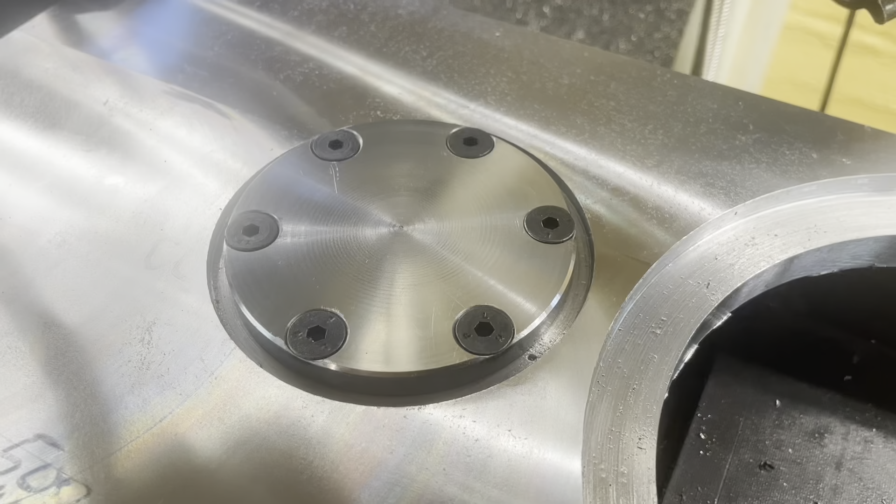Well, that came out pretty nice. Hope I put enough screws in there.

Well, here I am, back in the shop again. One of the requests I've had from several subscribers is to share a little bit more of the thought process behind the design of the housing, the design of the assembly, when I make one of these machines. And so what I'm going to try to do is share a little bit of that right now.

So I've spent quite a bit of time thinking about this. I've thought a lot about how long it's been since I've used a CAD program. It would definitely be easier to show some of this stuff on a 3D solid modeling program, but I've been through so many of those in my engineering career at various levels of proficiency. But the problem right now, especially since I've been retired, is I don't use them enough to maintain the proficiency, and it's kind of like starting over every time I do it. So anyway, this is where I am right now.

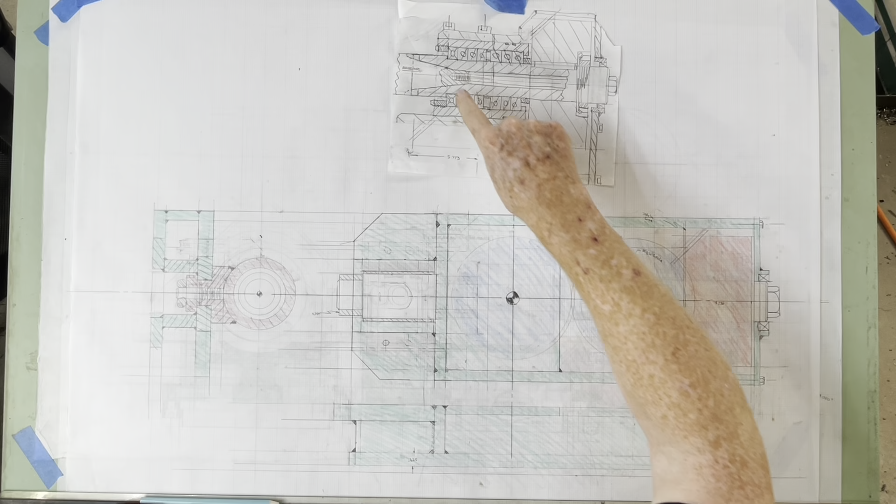I rethought the bearing support for the spindle. So this is the spindle that will drive the hob and locate the hob. It's going to be a 30 taper. It'll have a drawbar through the middle, and it's going to be supported in the center of the spindle by a stack of angular contact bearings. I think that's going to be just fine for what this has to do.

So the drive gear is going to be overhung rather than have bearings on both sides. I think that's overkill. So I'm going to put a stack of 6 or 8 angular contact bearings right down the middle, mounted in a common bore. It ought to be really easy to get this machined correctly for that. It doesn't really take much to locate those.

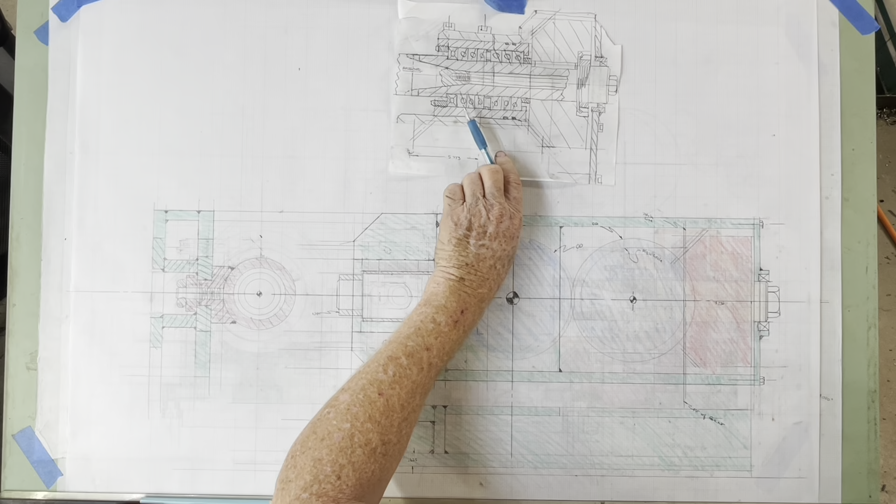You just stack them up with some of the bearings oriented with the pressure angle that way, some of them oriented with the pressure angle that way. And when you clamp it all up, they come together just right.

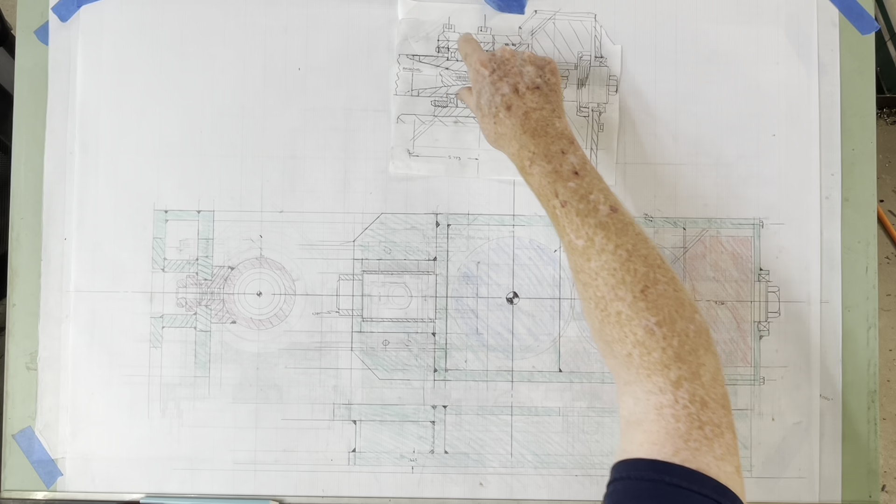So those bearings are going to be mounted in a bearing retainer, a bearing locator, a sleeve basically, some O-rings, threaded nut on one end to clamp everything up, and then that'll go into a bore that is mounted to a heavy cover plate that covers part of the back part of the box. And so that'll be adjustable this way. There'll be some kind of clamp arrangement to clamp down on that and locate it and retain it.

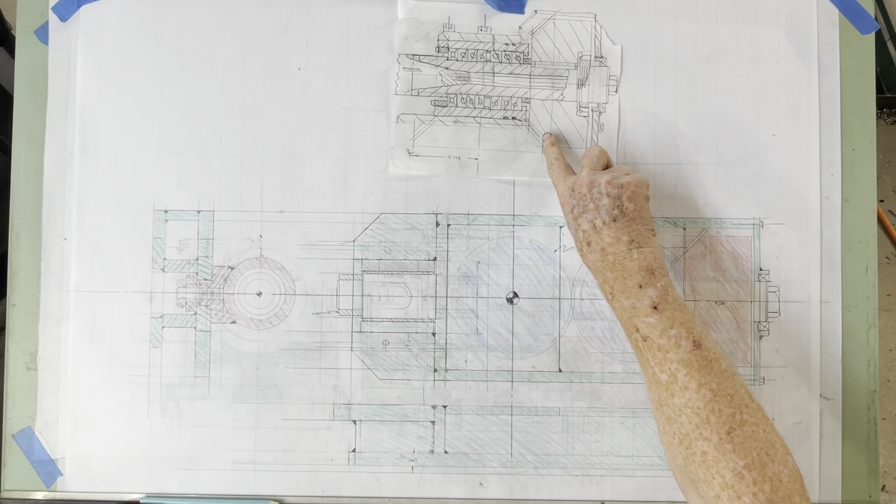That'll give me the ability to have a little bit of adjustment on the engagement of these bevel gears, so that's good. There'll be a cover plate that comes in from the back, just mounts around with a group of cap screws for sealing. I'm sure it's going to require RTV to get it to seal.

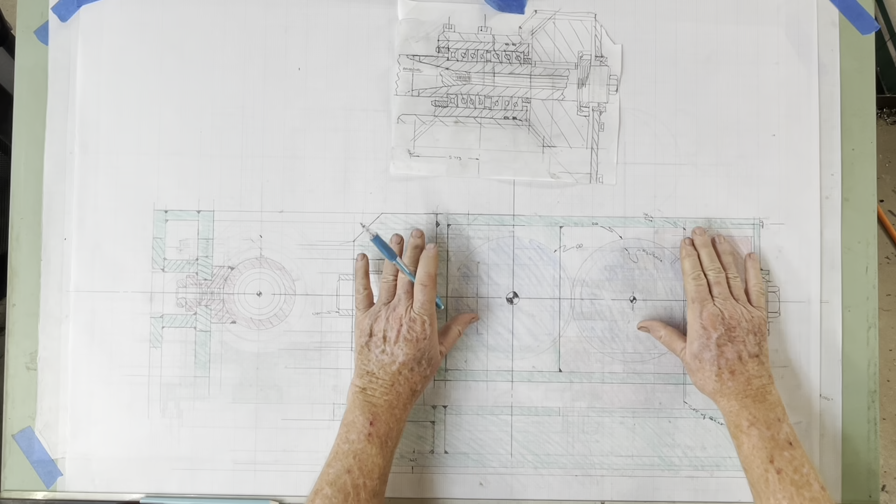But the housing itself, so this is the top view of the housing. The spindle of the machine tool head is going this way. The axis of the hob is running this way. So this is the kind of plan view. This is the edge view down here, and this is the end view.

The backbone is this 5/8 thick piece of steel here that's about 19 inches long and 8 inches wide. And that really forms the primary structural surface or structural member. But there are also these side rails that are that wide that run around 3 sides of that. In the back, there's a set of ways that'll be welded on standoffs like that. So this is kind of a section view.

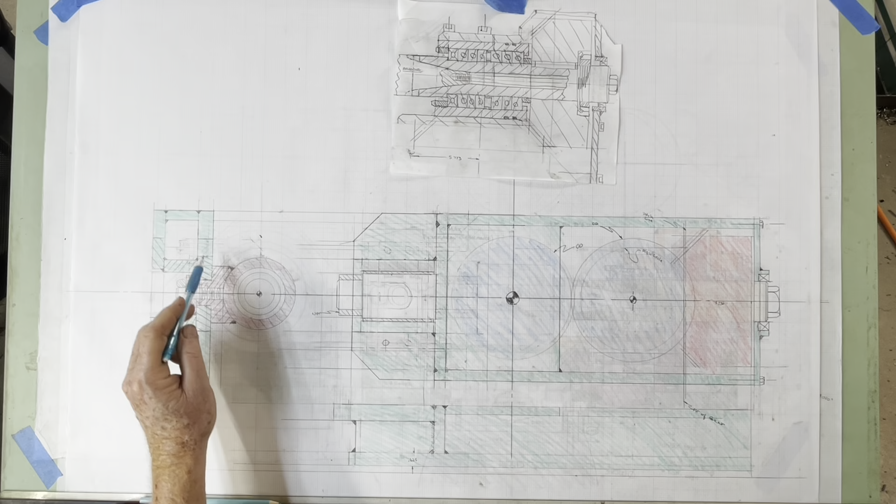The ways will provide location, but this whole top surface, the ways here and the tops of these side rails all have to be machined to a flush condition. This part here needs to be oil tight. I'm going to run this about half full of oil to splash around and lubricate all the components, the bearings and so forth.

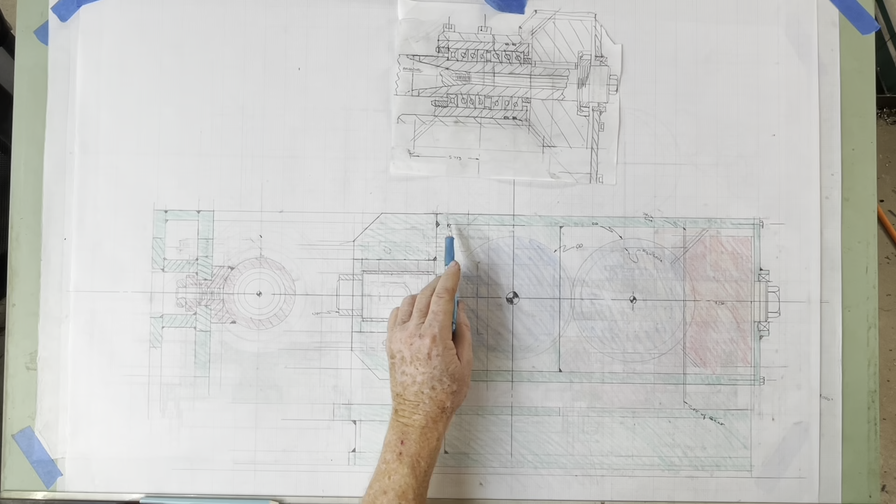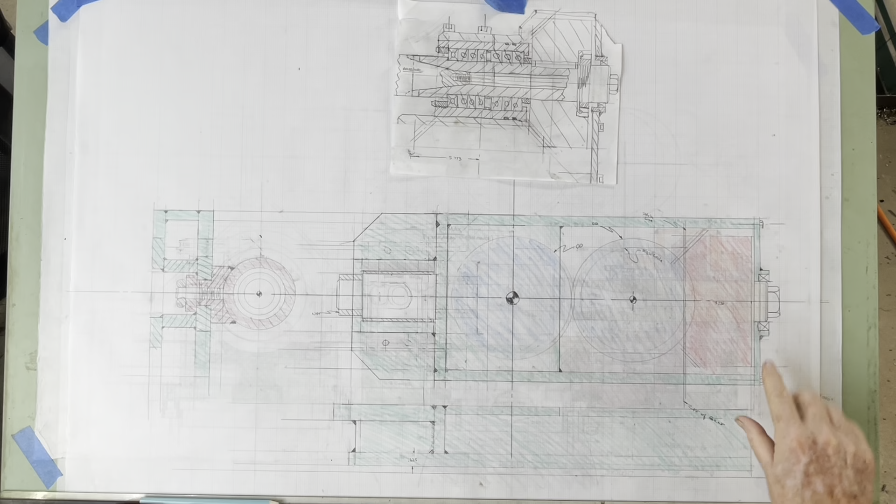So that's important that it be oil tight. There's going to be a flush cover that'll have to be welded in between these rails. I'm going to have to do a scarf weld around the three sides of that because it needs to be machined flush. And I mentioned the bearing support is attached to the cover that'll go over this, probably with a couple of dowel pins and a bolt pattern that will mount it and retain it and locate it.

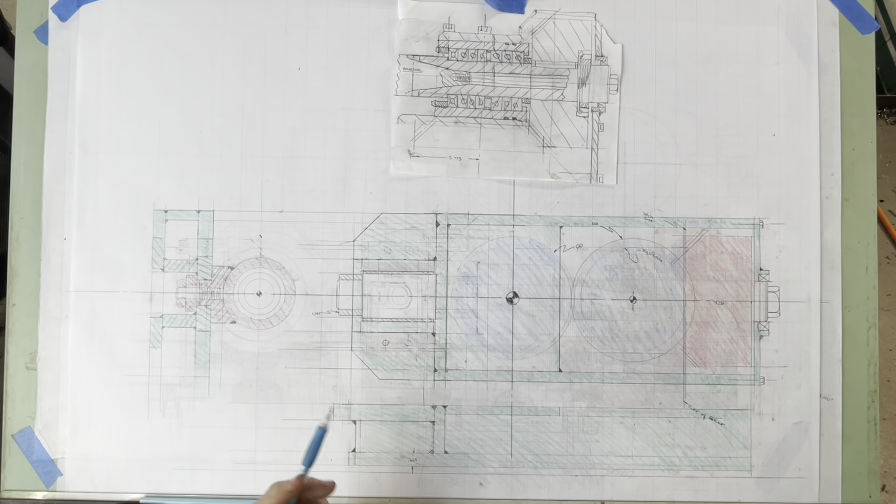This end is going to be a bronze bushing that'll go on a standard bearing block from a 1¼ inch arbor set. That's going to be the outboard support, and that'll be adjustable in and out for different sorts of operations. But basically, that's going to be an oil lubricated bronze bushing. There's quite a bit of area there. Those things really do a pretty good job. I'll have to come up with a way of supplying oil to the bushing, which I haven't done yet. But basically, that's the setup.

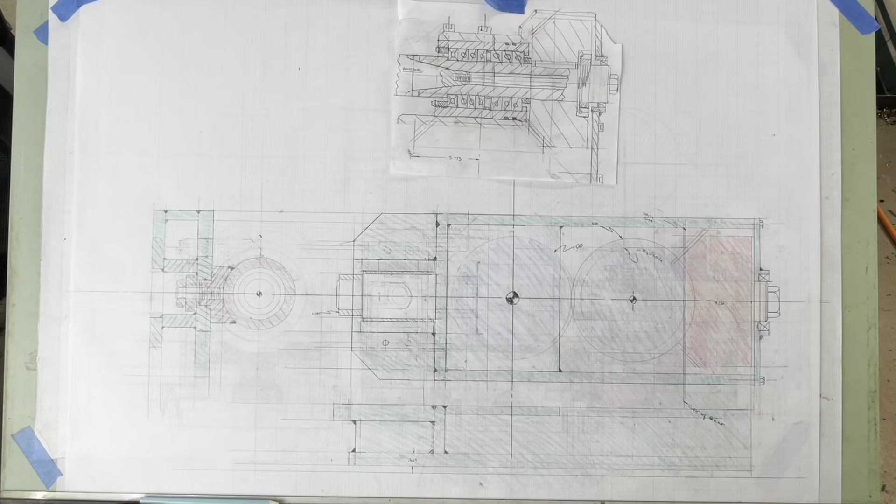So I need to start cutting pieces of steel to go on here. I'm going to start by cutting this big piece and getting it set up. I'm going to have to do some pre-machining on the inside because I don't want to machine any of that surface after everything's been welded. So, and then cut the side pieces, cut these rails and so on, and I'll have to kind of lay them out and see what the best sequence of welding operations is. So I'm going to try to cut all the rough stock, lay it out on the bench, and we'll make a plan from there. Well, this may take a while.

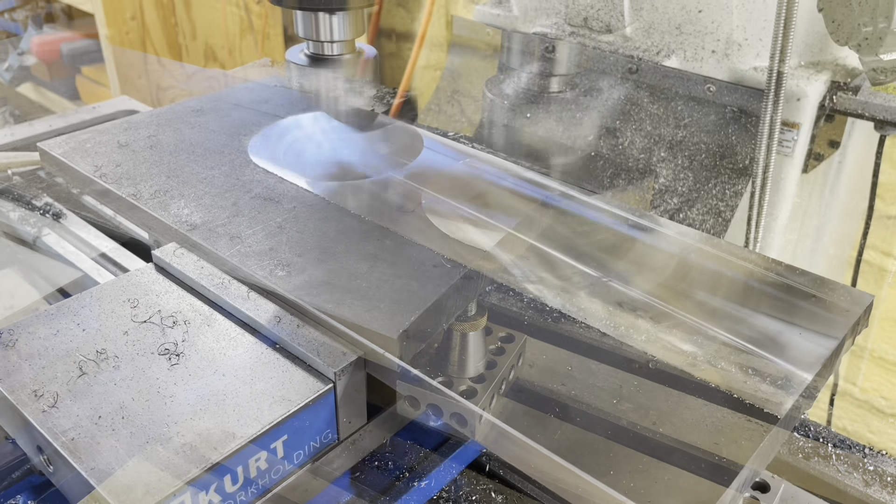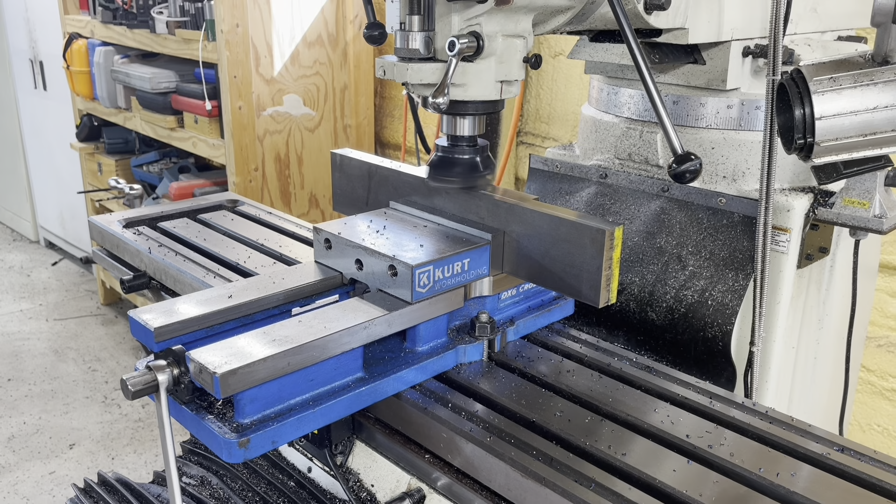Well, flattening a piece of steel plate this way with light cuts and a fly cutter is tedious as all get out, but boy, the finish sure does look good. I'm helpless before a good surface finish. Slow, really slow, my God. Man, I gotta get a vertical bandsaw. I'd buy narrower stock, but the steel store's closed on the weekend. So you do what you gotta do.

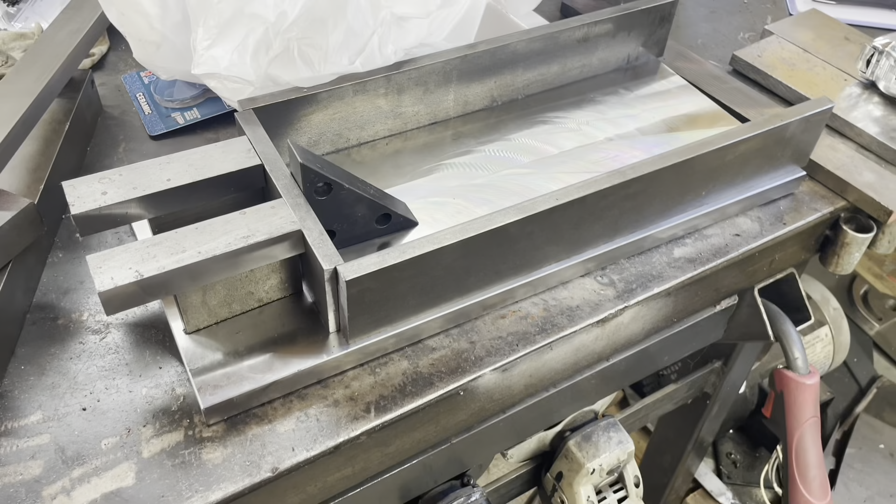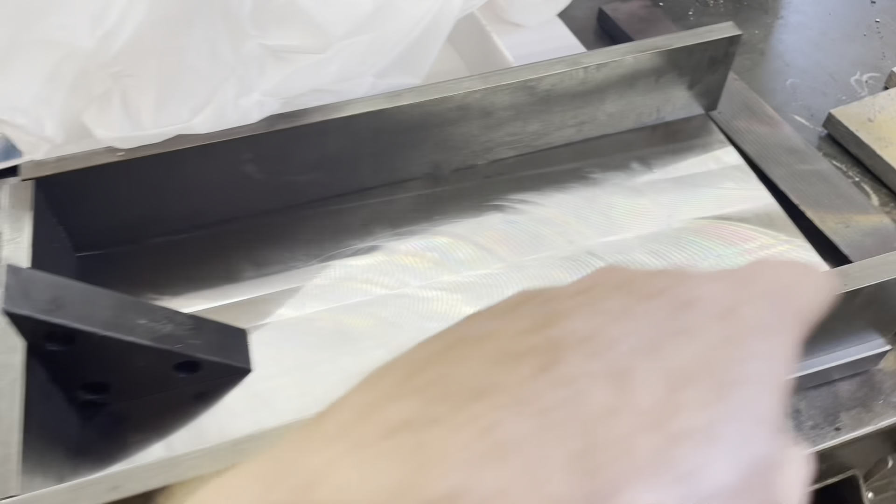Well, this is the rough arrangement of the housing. A piece of 5/8 steel plate that's going to be the backbone, and these pieces of 1/2 inch will be the structural sides. This right here is a wall that will help close this area off because that has to hold oil. So this is going to have to be welded continuously on at least one side, probably both sides, just to make it a little bit stronger, I guess. But anyway, this is the basis for the ways that are going to mount the outboard arbor support.

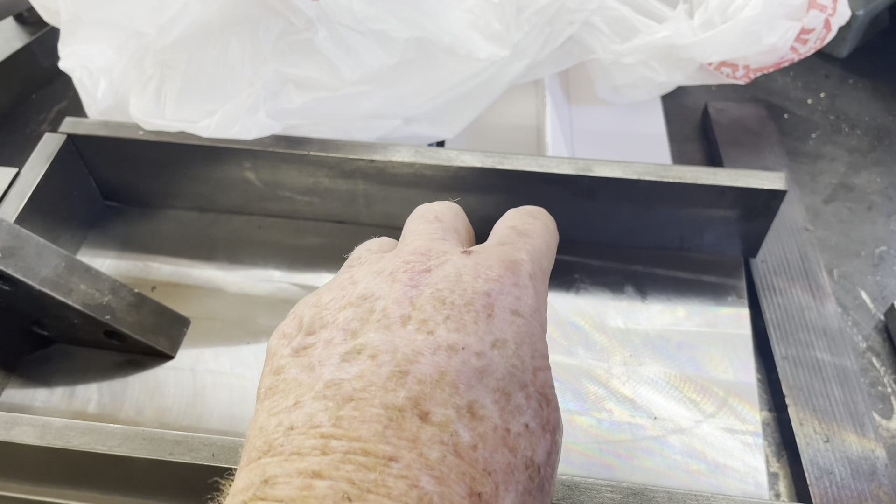So there'll be a gear here driving a bevel gear. There'll be another bevel gear mounted here. The shaft will go that way, and then there'll be a one-piece plate, probably 1/4 inch steel, that will seal the end of it, but still give access to the drawbar.

Well, this is all pretty heavy welding, so I'm TIG welding at 200 amps, and it's a hot day, and dang, the torch gets hot after a while. So this is basically a break while the dang torch cools off. Maybe I'll get a water-cooled torch with some of that fat YouTube cash that I'm not getting. So anyway, that's what the housing looks like at this stage. Still a lot of welding to do.

Well, there it is. That's the weldment for the hobbing head for the Van Norman machine. It's about 96 degrees in my shop right now, even with ventilation running. It's a really hot day here. And the TIG torch kept overheating, and I had to stop and wait for it to cool off, and finally I just said screw that and got out the MIG machine and finished this off.

It's so much faster. I'll do nice clean, well, I'm bragging now, but nice clean TIG welds in the wintertime when it's a little cooler in here. Those of you that have watched my videos before know that I'm really exaggerating my TIG ability. But anyway, this doesn't look too bad.

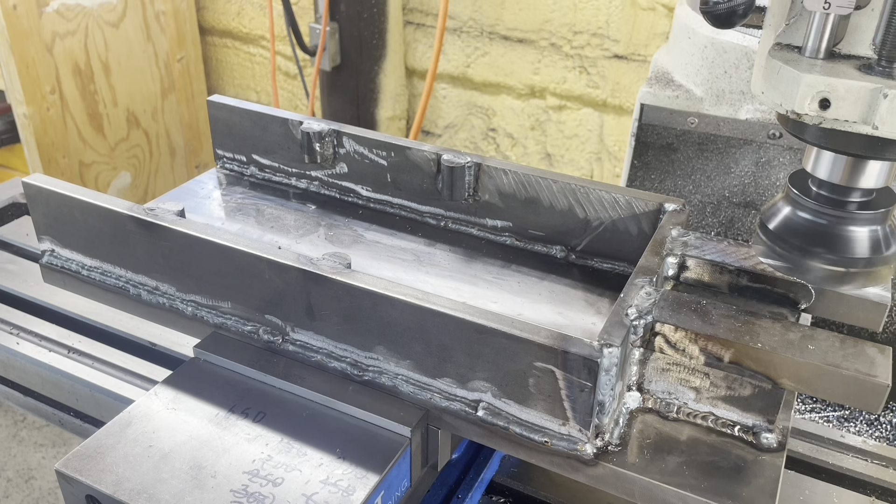Well, my wireless mic crapped out on me for this little clip here, and I just was commenting that I had to stop and take everything off the machine and weld in this cover plate that's actually being machined right now. So a bit of a backup and start again, and this is just about cleaning up, getting everything flat and level, and then we'll flip it over and machine it on the bottom face too to take any distortion out.

This hopefully will be the final pass on the top surface. And then when I'm done with this, I'll flip it over and machine the bottom side parallel. Probably about the same way. So far, so good. Bring up the edges. I'm going to have to turn this over again at some point. I need a true edge that's aligned with the x-axis. So that'll give me a basis for clamping on the other side.

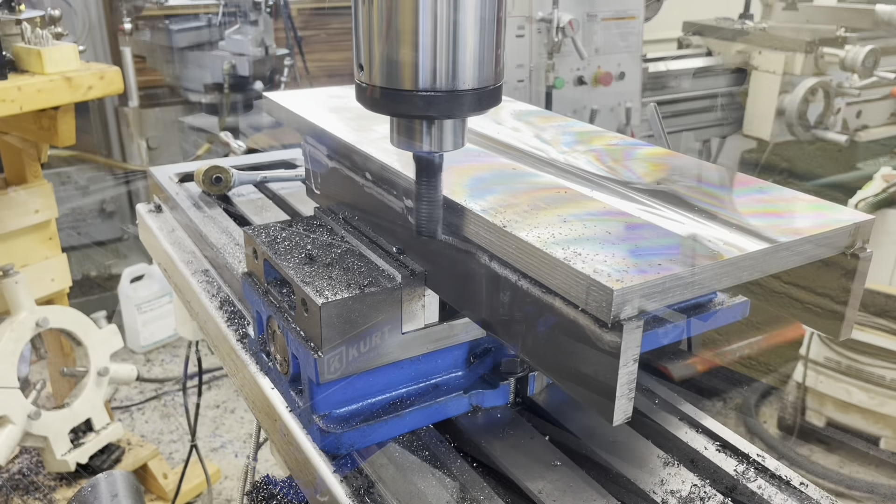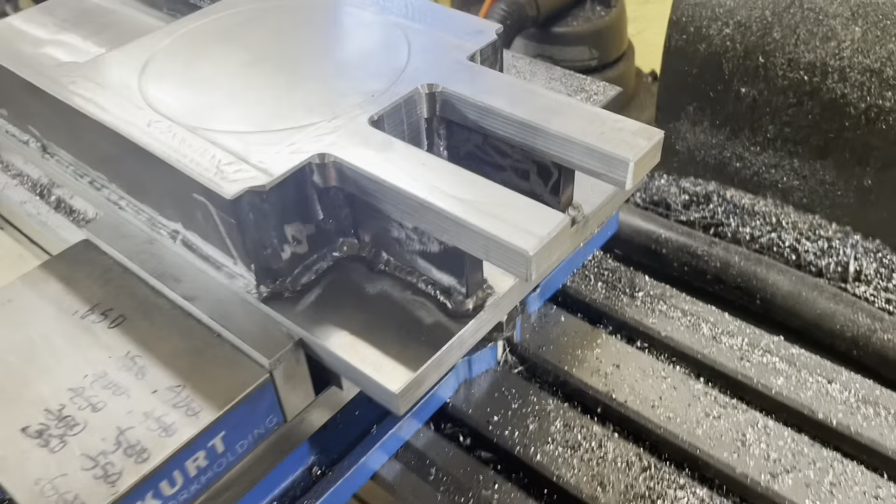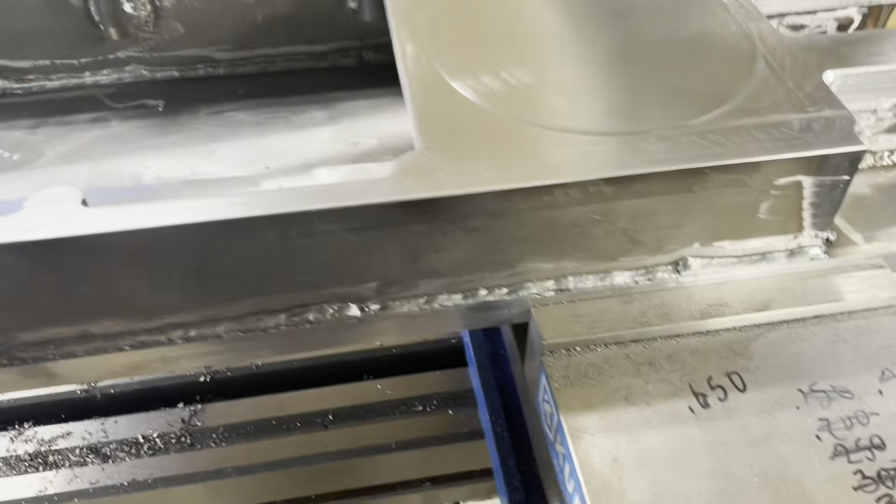Those colors. Yeah. Well, this is the weldment with most of the surface machining done. Now top and bottom are finished in parallel. These ways are straight and square with the axis and machined to size.

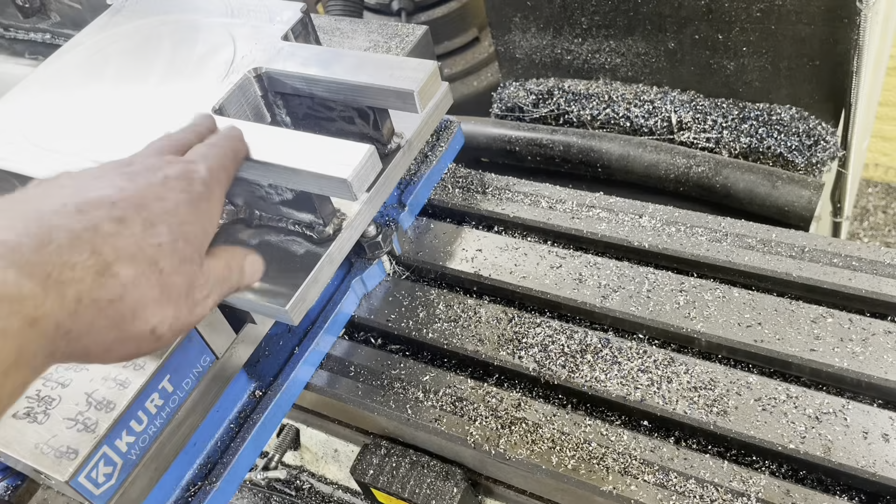So the next step will be to turn it over and take the vise off, mount this thing face down or top down on the table, and then I'll start doing the boring and drilling and tapping and stuff that happens on the bottom. Stay tuned.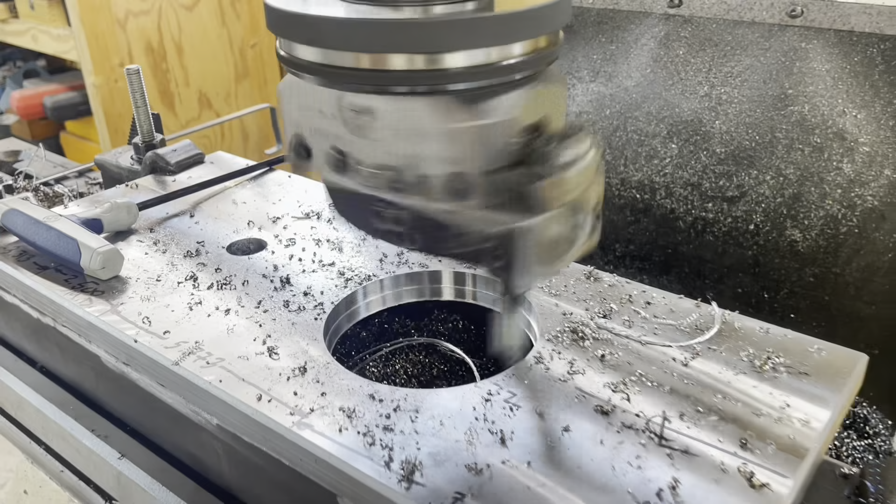Like every time I use a boring head, particularly a new one, I go through a real learning curve, but it always ends up with running it at higher speeds and lower downfeed rates. There's also a bit of an art in setting the cutting angle of the tool, but it's just one of those things I keep having to learn.

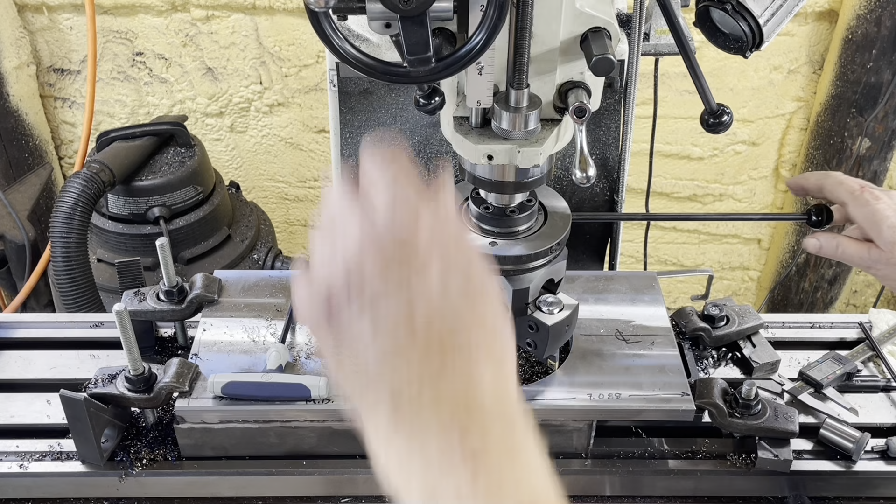Well, this is my first crack at facing with this Narex boring and facing head. So you have to kind of watch carefully to see the chips coming off the face of the part. But this is a really cool little machine. I should have had one of these before, I think. Would have saved me a lot of trouble.

There, the feed kicked out. That's a little clutch pin. That's exactly what we want to have happen.

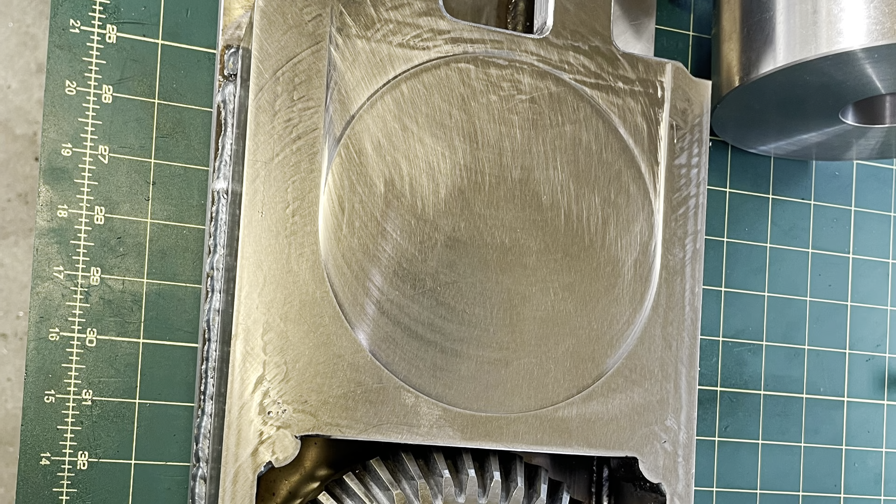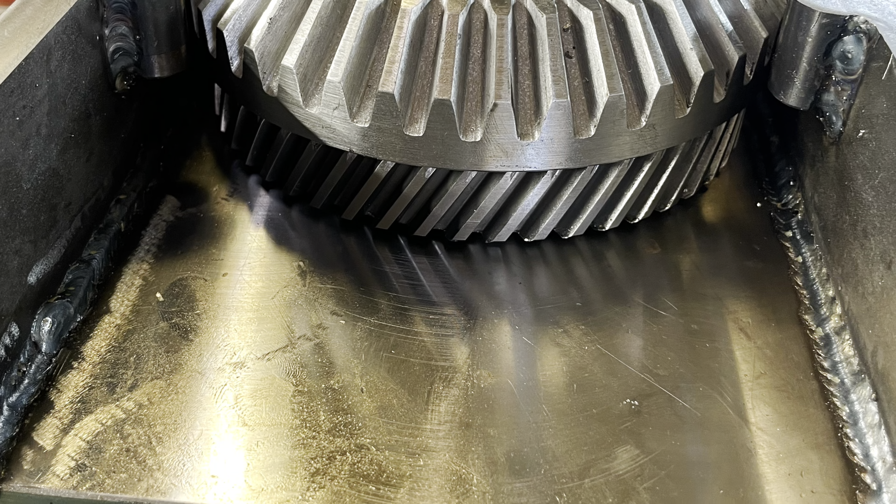Well, there's still some work to do on the housing, but it's at a stage now where it's actually kind of functional, and I've got enough parts that I can test run it, so I'm going to show you a sneak preview of that. There's still more work to do, and I'll document that in some future videos. Okay, this really is the first run, so I'm kind of curious to see how this goes. All ahead dead slow.

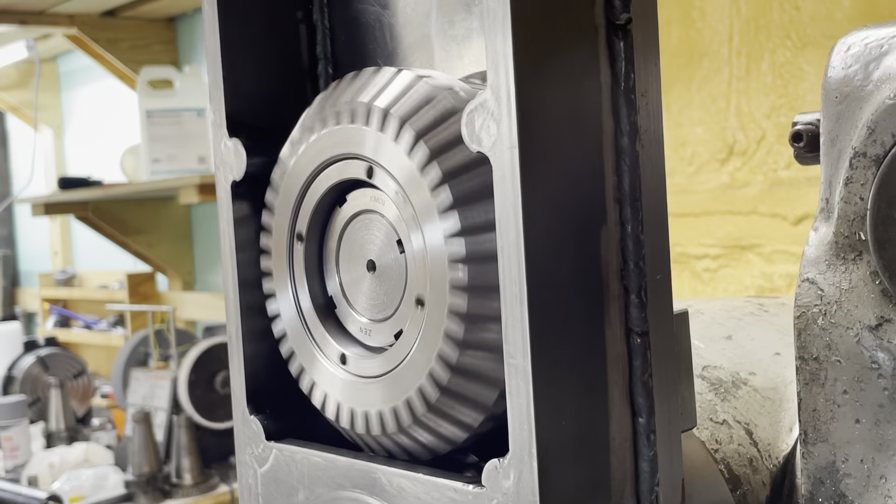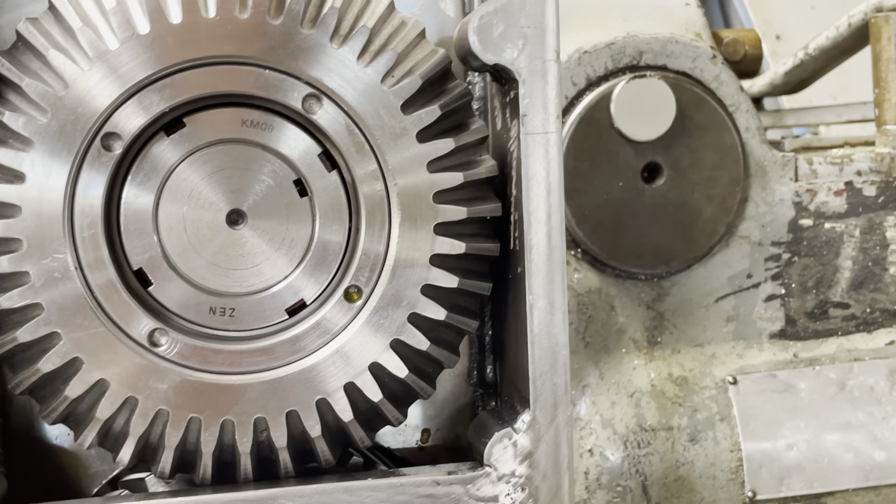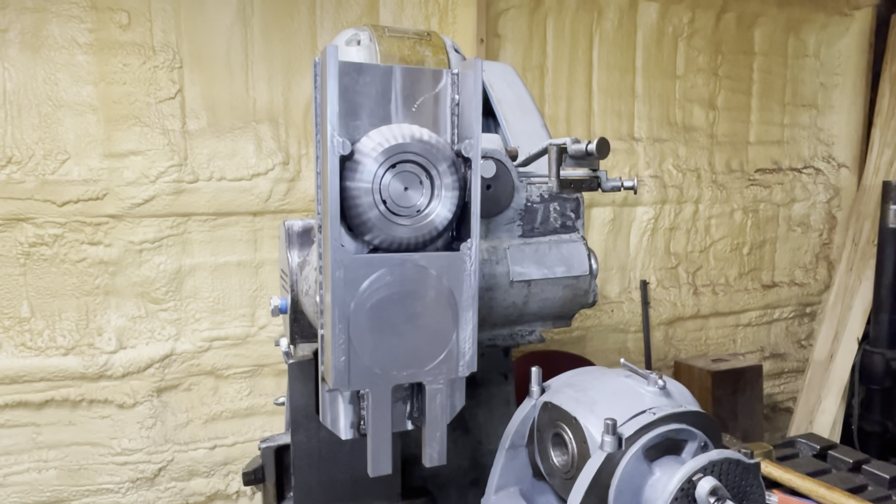250 RPM. This would be at the high end of a hobbing speed. I can hear it a little bit there, but that's not bad. I don't want to run it too long. I don't have any oil in the bearings. But woohoo! Well, so far so good.